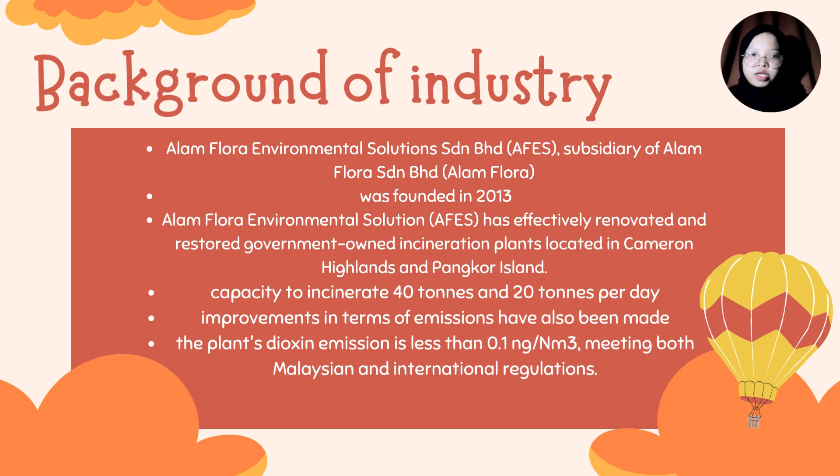Problem statement of this project is that burning municipal solid waste (MSW) is a practical solution for waste management concerns, but it comes with significant air pollution risks. The pollution emitted into the atmosphere when various waste materials are burned in incinerator facilities is a serious environmental issue that has to be addressed immediately and with purpose.

Overcoming this challenge requires a comprehensive approach that considers technical advancement, environmental sustainability, economic feasibility, and social fairness. The objectives of this project are to analyze the advantages and disadvantages of municipal solid waste incineration, to investigate standard regulation measures related to environmental safety and air emission, and to propose air pollution control devices related to the incineration process.

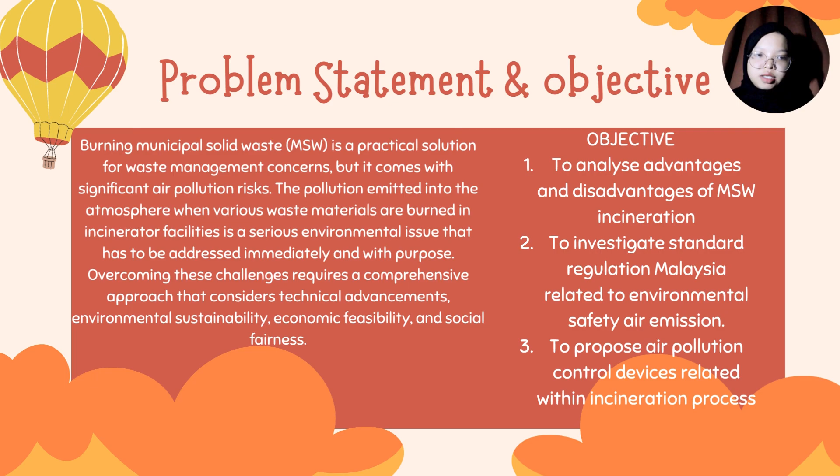The scope of study of this project is that the study of municipal solid waste incineration encompasses a thorough examination of technical, environmental, socio-economic, and policy factors associated with this process. The goal of the study is to provide a comprehensive evaluation of alternative incineration methods, accounting for their efficacy, scalability, and adaptability to diverse waste kinds.

To optimize the incineration process, the research will further investigate strategies for trash sorting, source reduction, and pre-treatment protocols. We will extensively investigate the effectiveness of municipal solid waste incineration regulation frameworks and policies at the local and national levels to determine how effectively they protect public health, safety, and the environment.

Assalamualaikum warahmatullahi wabarakatuh. My name is Siti Nofitra Binti Saidin, and I will present the literature review part, where we have the advantages and disadvantages of incineration.

First of all, for the advantages, firstly, we can recycle the heat energy to generate renewable electricity. Second, it can reduce the volume of the solid waste to 10% of the original size. Third, it can lengthen the life of landfills. Next, it can decompose part of the toxic materials into carbon dioxide. And we can also limit the space use.

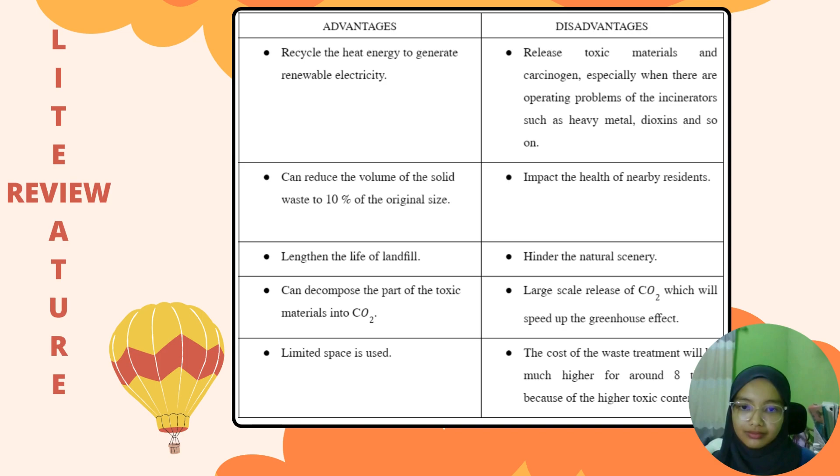Next, we continue with the regulations in municipal solid waste. First, we have the Environmental Quality Act 1974, Act 127, and we use sections 21, 22, 24, 25, and 29. Second, we have the Solid Waste and Public Cleansing Management Act 2007, the National Strategic Plan for Solid Waste Management in Malaysia, NSP, and the last one, related to environmental quality, which is the Scheduled Waste Regulations 2005.

For the last part in this literature review chapter, we have compliance and environmental safety, and we have 6 of them. The first one is regulatory compliance, which is keeping updated about the laws that control incinerator operations on a local, state, and federal level, and respecting operating guidelines and emission limitations to guarantee compliance with environmental regulations. Second is emission monitoring and reporting. We put in place an ongoing emission monitoring system to evaluate and document the amount of pollutants emitted during burning.

Third, we have particulate matter control, which is utilizing efficient particulate matter management devices, including scrubbers, baghouses, and electrostatic precipitators, to capture and eliminate the tiny particles before releasing them into the atmosphere. Fourth is combustion efficiency. In combustion efficiency, we operate incinerators at optimal conditions to ensure complete combustion of waste materials and minimize the formation of pollutants. Fifth, health and safety measures, where we must put safety precautions in place to protect employees working at incinerators from dangerous material exposure.

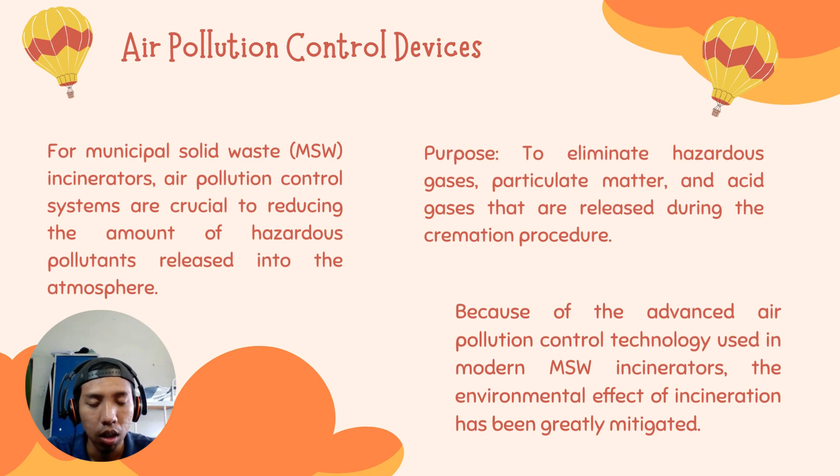For air pollution control devices, first, fabric filter baghouse. It is a useful technique for taking tiny particles out of a gas stream. It is also important for the emissions of numerous hazardous and carcinogenic organic aerosols, heavy metals, and respirable particulates, which are PM2.5 and PM10.

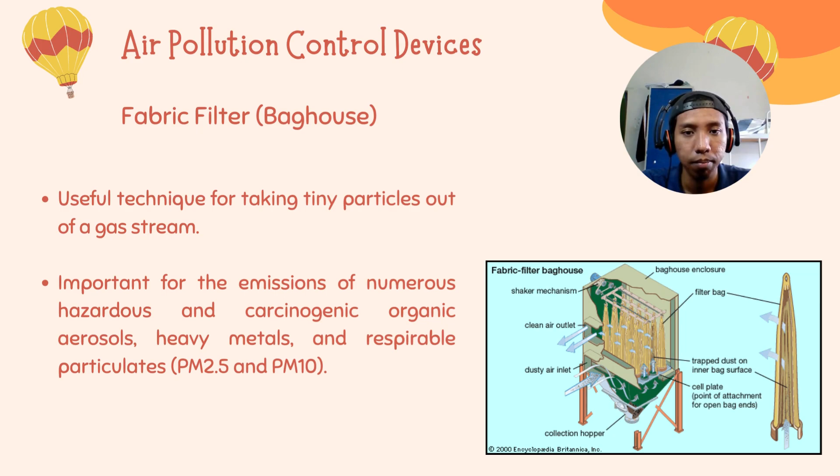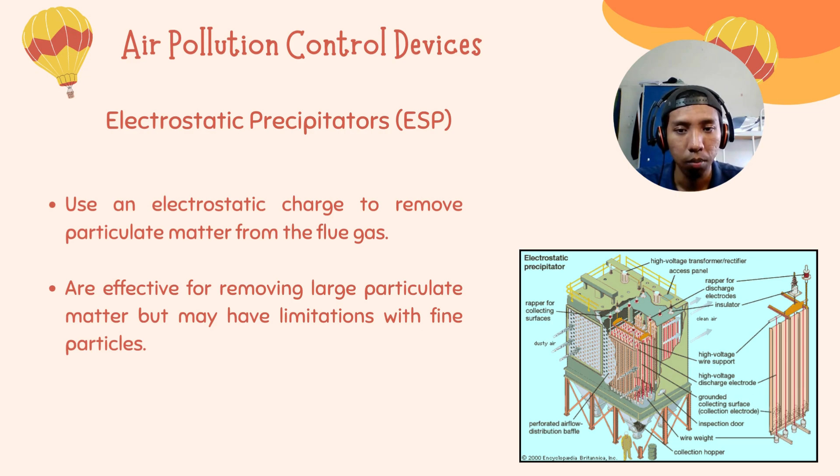Second, electrostatic precipitators (ESP). It uses an electrostatic charge to remove particulate matter from the flue gas. They are effective for removing large particulate matter but may have limitations with fine particles. Next, wet scrubbers. It uses a liquid, usually water, to absorb and remove pollutants. It is also effective for removing acid gases like sulfur dioxide and can capture some particulate matter.

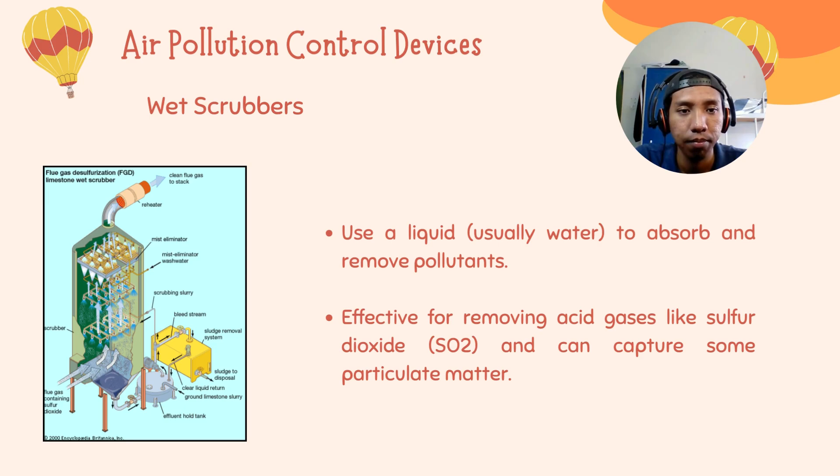Fourth, carbon adsorption. Activated carbon adsorbers capture volatile organic compounds, VOCs, and certain other pollutants. Activated carbon adsorbers are effective for VOC control.

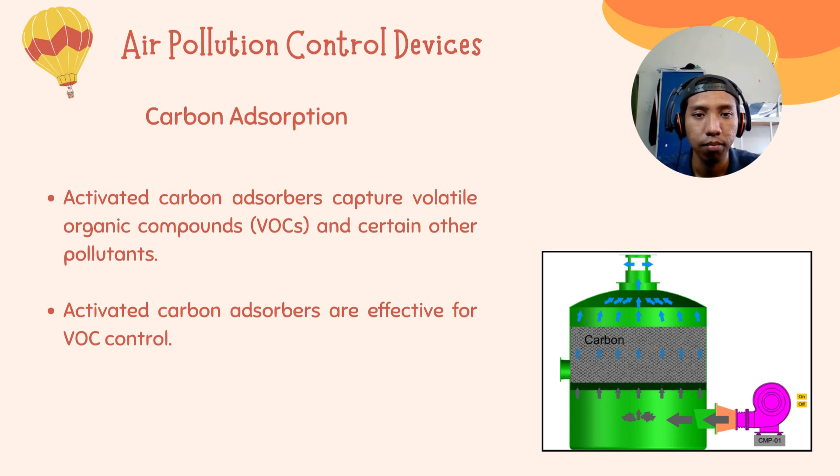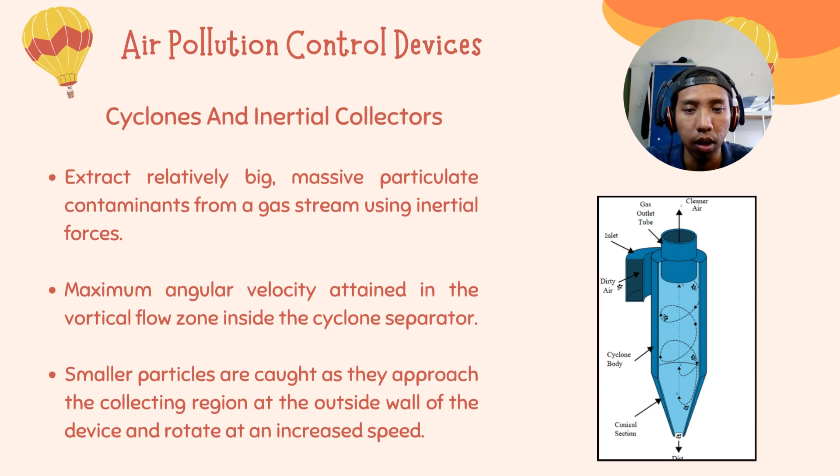Last, cyclones and inertial collectors. It extracts relatively big, massive particulate contaminants from a gas stream using inertial forces. Maximum angular velocity is attained in the vertical flow zone inside the cyclone separator. Smaller particles are caught as they approach the collecting region at the outside wall of the device and rotate at an increasing speed.

Discussion for Task 1. Waste incineration is an effective method for reducing trash volume but raises environmental concerns due to pollutant emissions. Air pollutants released during the incineration process pose significant risk to both environment and human health. Despite challenges, Malaysia explored incineration as an alternative disposal method considering landfill limitation and environmental impact. Stringent emission regulation and advanced technologies are essential to mitigate environmental and health risks associated with waste incineration.

Effective air pollution control devices such as fabric filter, electrostatic precipitator, wet scrubber, carbon adsorption and cyclones play a crucial role in addressing emissions. Achieving a balance between waste volume reduction and minimizing environmental impacts requires continuous improvement, exploration of alternative technologies, and public engagement. Emphasizing ongoing advancement in air pollution control devices is critical for achieving a harmonious equilibrium between waste management efficiency and environmental stewardship.

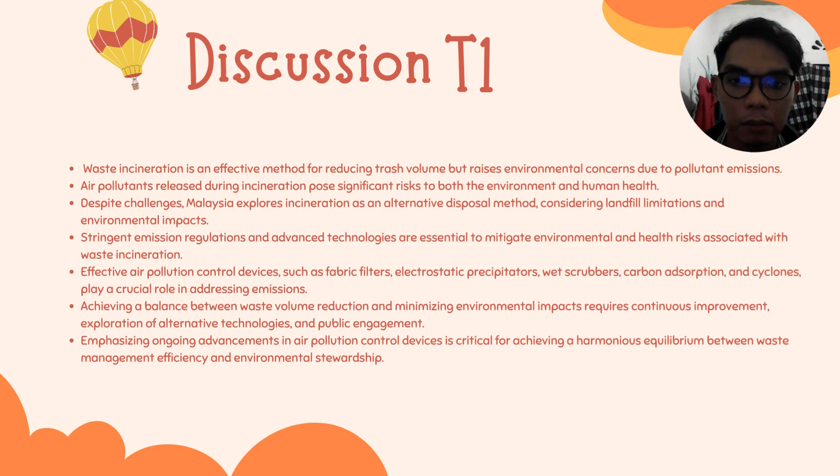For task 2, we use TOXFLAM software for conducting the data. Let's continue our presentation with TOXFLAM. What is TOXFLAM? TOXFLAM is an analytical model that describes the atmospheric dispersion of inert gases. It is based on a unique general solution to the diffusion equation which represents instantaneous, variable, and infinite duration releases. It computes the concentration field at predetermined periods, the highest concentration at each location, and the average concentration during a fixed time interval.

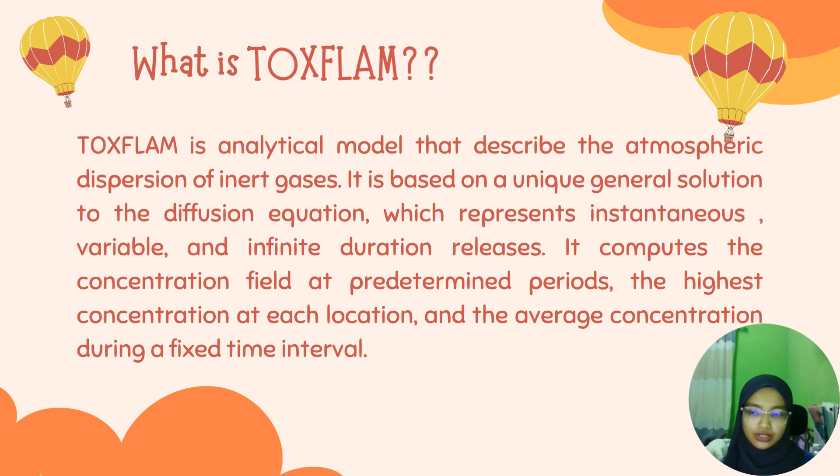The result: for constant data of wind speed which is 2.5 meters per second, ambient temperature 12 degrees Celsius and mixing height about 400 meters, the place that has been selected based on TOXFLAM is an industrial area where there are many factories that release their factory fumes, located at Monza MB, Italy.

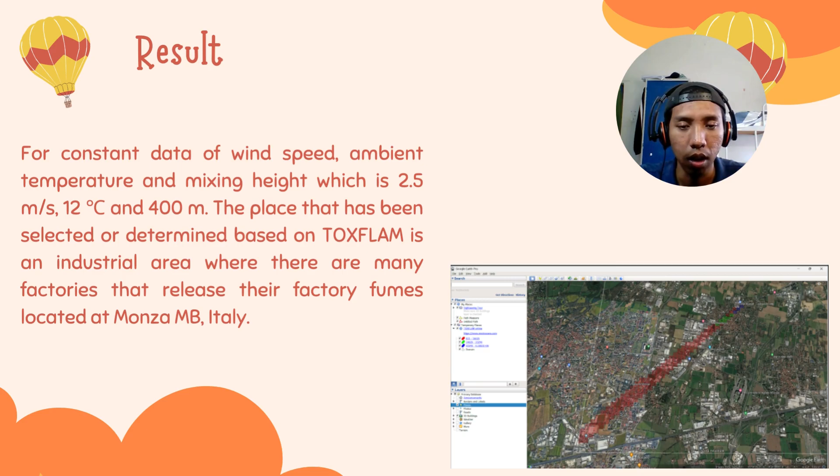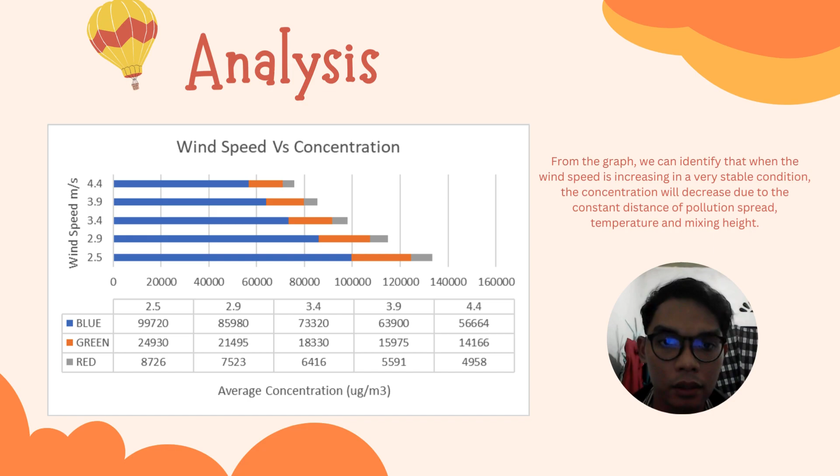Analysis. The figure shows the graph for wind speed versus concentration. From the graph, we can identify that when the wind speed is increasing in a very stable condition, the concentration will decrease due to the constant distance of pollution spread, temperature, and mixing height. For the second variable, which is temperature, the figure shows the temperature versus concentration graph. When the temperature is increasing in a very stable condition, the concentration will remain the same due to constant distance of pollution spread, constant wind speed, and height.

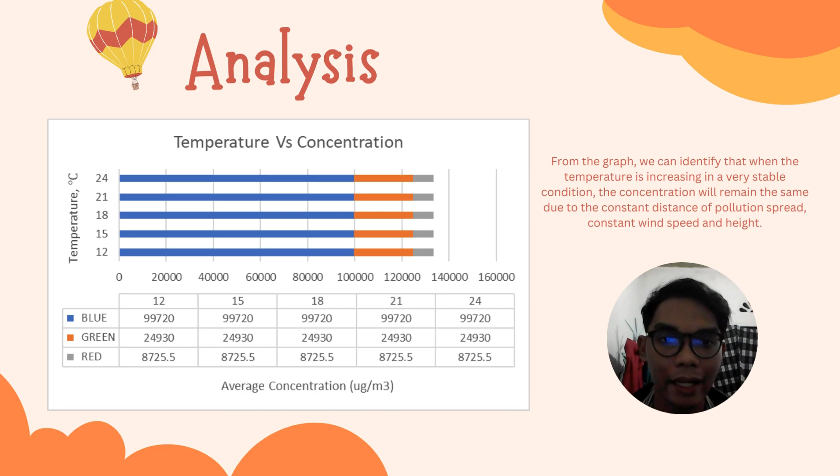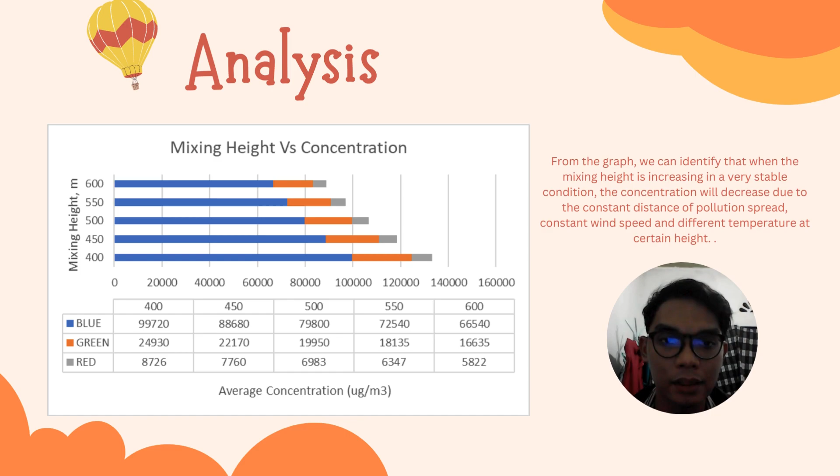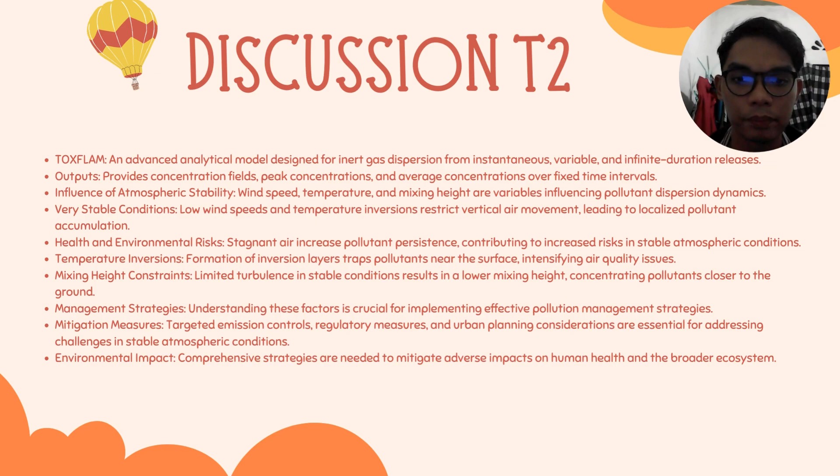As the conclusion for both tasks, waste incineration in Malaysia addresses recycling challenges, but it raises environmental concerns. Malaysian proactive measures, including robust regulation and modernization efforts, highlight a commitment to sustainable waste management. Advanced technologies like TOXFLAM demonstrate a focus on understanding and mitigating pollution impact. Balancing waste management efficiency with environmental stewardship requires active public engagement and collaboration. Overall, a comprehensive approach integrating technology, regulation, and public involvement is essential to minimize adverse effects of waste incineration on the environment and human health in Malaysia.